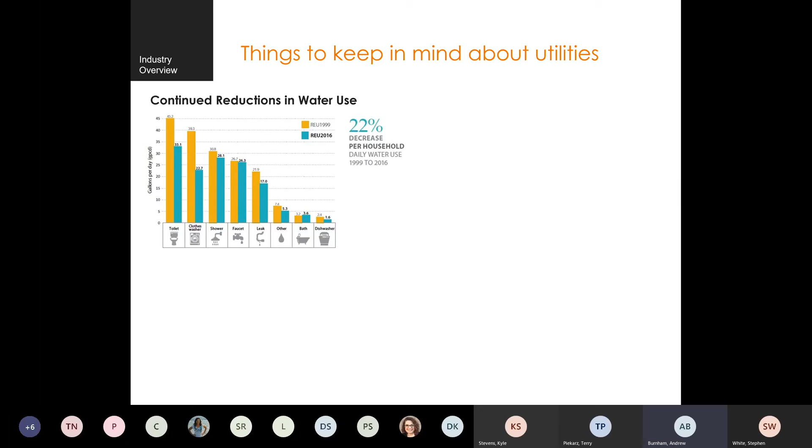Before I turn it over to Kyle to get into the water system, I wanted to remind everyone about a couple of things that cause challenges for utility systems on an ongoing basis. Utilities have not only operational cost inflation, but continued changes in water use, notwithstanding the significant amount of underground infrastructure and staffing levels we have to maintain, and a significant amount of investment in that underground and above ground infrastructure to make sure we can meet customers' and the community's expectations for level of service.

This often results in rate increases, which we talked about last time, that are above the general rate of inflation. We'd highlighted these reasons as part of last time, and we'll continue to come back to these themes. It's important for a fundamental understanding through this process for us all to recognize that utility systems across the country, and the city of Tempe is not unique in this regard, face challenges that cause upward pressure on rates over time, making it very difficult to have a sustainable financial forecast that can meet level of service expectations without future rate adjustments to keep pace with these items.

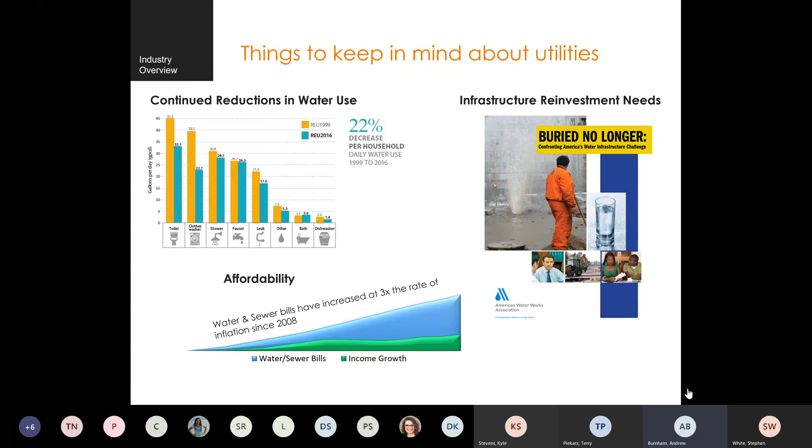I just want to put that out there before Kyle starts walking us through the water system, to give us a bit of orientation and background. So unless there are questions on the big picture, I'd like to hand it over to Kyle, our project manager for the study, to start going through the analysis. If there are detailed questions, Deb, our lead consultant, is also on the phone and may be able to pull up additional details and information along the way. Of course, city staff is here to help and participate as well. So Kyle, maybe you could start walking through the water system, and we'll get into things.

Perfect, Andy, happy to pick it up. With regards to the water system, we've got a few slides. I wanted to put this first one up to give us some guiding information about the system. In a community, oftentimes we don't see the system or the scale of it, since so much of it is buried. So I put some of the big descriptors up here. The one that really sticks out to me is that when you add up all the miles of pipe back to back, we're talking about 850 miles of water lines. There's a lot of pipe in the ground, and it's a relatively complex distributed system that we're looking to fund and understand all the operating costs for over a multi-year period.

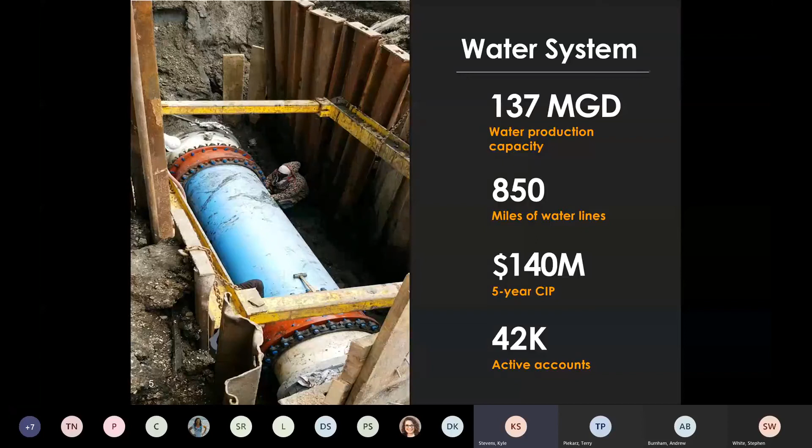If we go to the next slide, and we contrast that against volume, this table to the left shows for 2019 the amount of volume, typically displayed in K-gallons, which is simply thousands of gallons per customer. So this shows the total amount of gallons by customer.

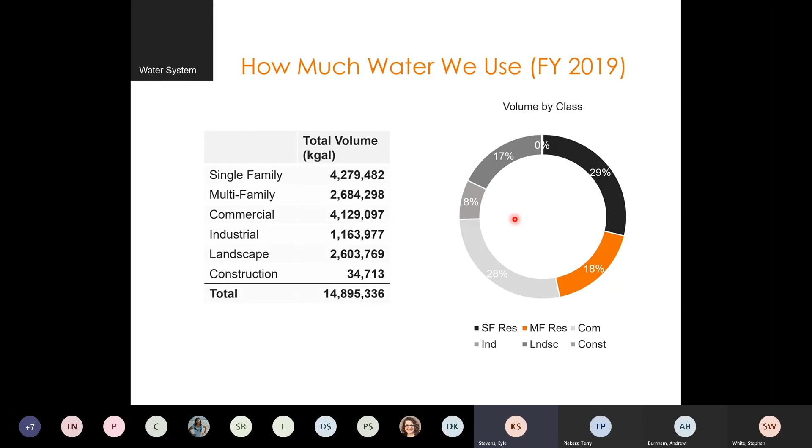That goes along with the theme we've talked about: these are enterprise funds, often referred to as business-like entities, meaning their accounting is completely separate from the city, and charges for services, the use of those services, are the primary driver of revenue to cover the operating expenses.

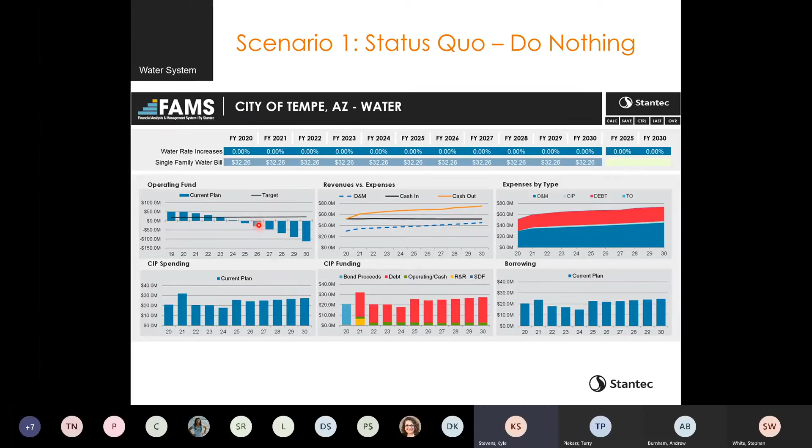And if we were to go to 2025, we would actually see balances go negative. Now, while that's not a reality that could actually occur, this trajectory shows us the rate at which we're burning cash, and that we would go below our defined targets into a minimum situation. So the next scenario one might want to look at is: what's required just in time when the need arises to fix this situation?

So what we can see in this particular situation is, if I start again on this top table, you can see water rate increases. Instead of 0, we've asked the model to fix this deficit on a just-in-time basis. You can see in '21 it's 0%, and '22 a 0. But then in '23, as balances came down very quickly to our minimum, and had we done nothing would have gone negative going forward, the model starts to correct by increasing revenues. In this just-in-time version, it's increased revenues by 10.4% in '23. In fiscal year '24, you see a pretty large adjustment of 43%.

And if I go to revenues versus expenditures, you can see our ongoing deficit. But as our balances start to hit that target, you can see in the black line, instead of being flat, it's crossing over to make up the deficit we've created and create a sustainable plan going forward. So this is one solution. It's a little bit rough, what we like to think of as a rate shock, when you allow cash flow deficits to accrue over time and then have to fix it. It requires a lot of upward motion in one year to fix that problem quickly and not allow balances to go negative.

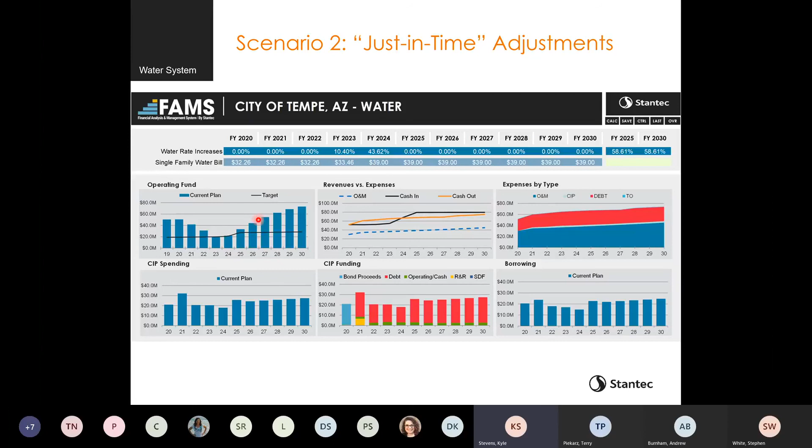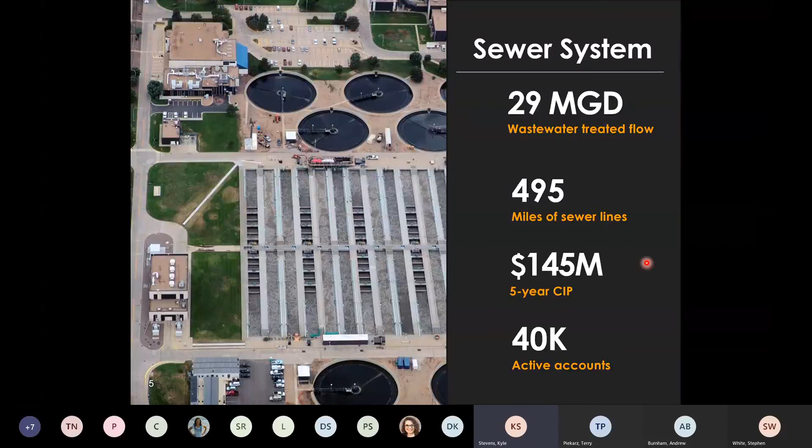Very similar discussion, parallel discussion on the sewer side. So some of this information will be reiterated, just with a different vantage point, looking at the sewer system this time. To give you some idea of scope and scale of the system: wastewater treated flows about 29 million gallons a day, 495 miles of sewer lines, $145 million of capital investment in the next 5 years, about 40,000 active accounts. Very similar to water, a little bit different, but a very similar size and scope, meeting the community's wastewater needs. So how many customers do we have in representation?

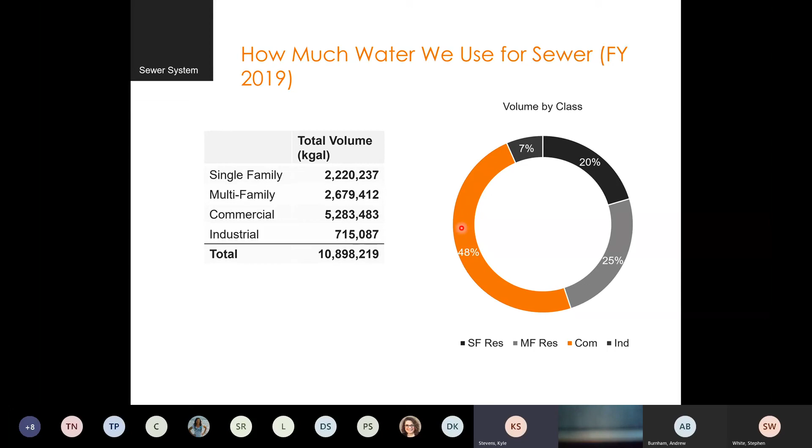If we talk about how much wastewater we use, the water that's used and then returned to the wastewater system, off to the left I've got the table again showing this in thousands of gallons. It's a very similar conversation to before, except the proportions are a little bit different here. Single family is very represented in the number of connections, but when we talk about volumes, they're only about 20%. Multifamily is 25%, and commercial in Tempe makes up a large proportion of the volumetric flows on an annualized basis, followed by industrial.

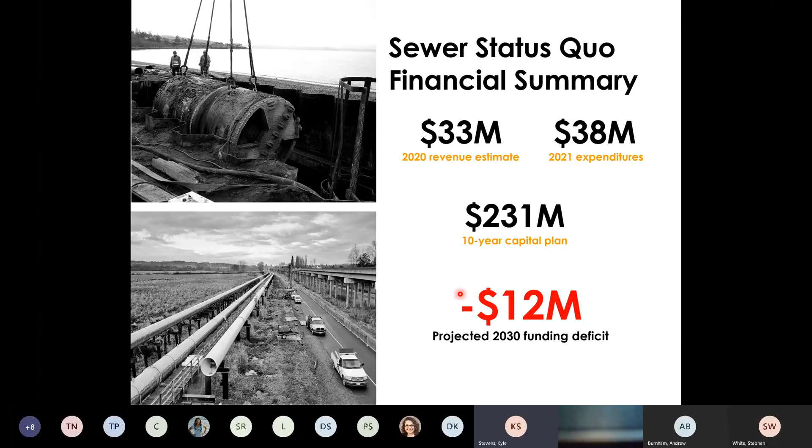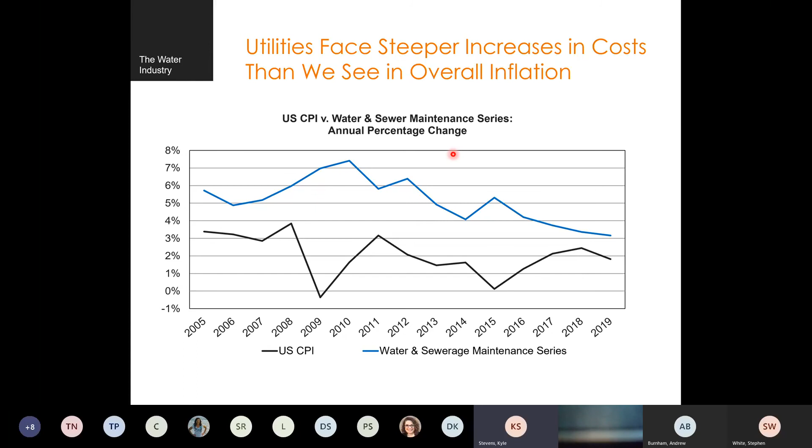Again, just the commentary that typically we see pretty good inflation. The real takeaway on the sewer side is, you're not necessarily seeing that kind of inflation come in the underlying expenses or in the makeup of the capital program that's causing us to do rate increases at a high inflationary level right now. That's a very sustainable system on a go-forward basis and likely will not need increases in the near future.

So Steve, I think I'll stop here. I know that's a lot of information on the two systems and the revenue projections, but happy to go back, talk about it, and dig into it in more detail if there are any questions.

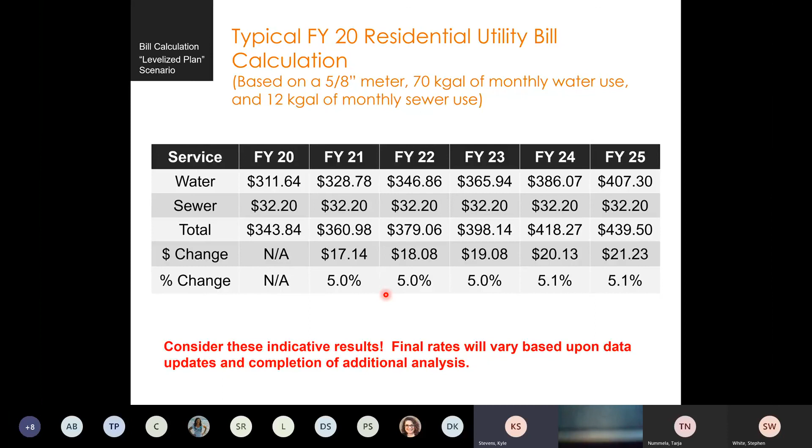Another thing to note is it's not always a peer-to-peer comparison. These figures are useful but typically change year to year as communities make adjustments. They're under similar pressure as the city of Tempe with regard to aging infrastructure and the need for capital investments, so this might change year to year, and there might also be a different level of service under the hood. Just a caveat as we talk about these comparisons.

If we take the larger bill, with 70,000 gallons of water use and 12,000 of sewer use, and stack it up against other communities using that same usage amount, the average bill is about $364. We're slightly under that, still in a similar position, on the lower side if you take the midpoint of communities serving customers within the valley. So still in a good position from a peer comparison standpoint.

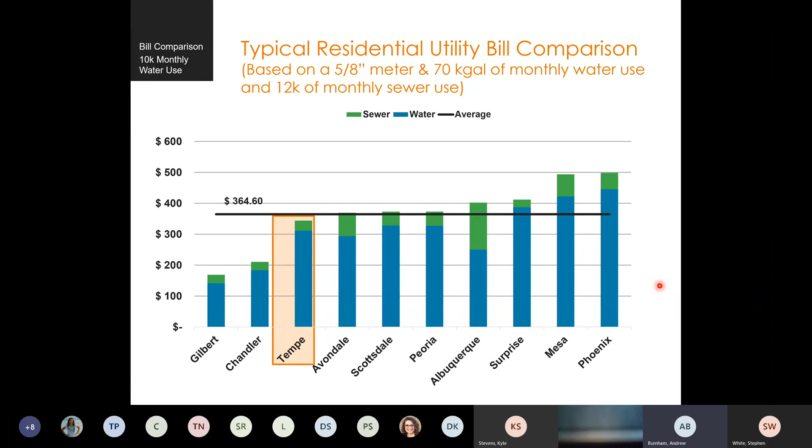Kyle and Andy, Stacy asked a question regarding whether we have a slide comparison for commercial customers, for a large commercial customer. I don't believe we have one as part of this presentation, but I think we can put one together and send it out after.

Yeah, we absolutely could. So the big nuance on commercial is that usage levels can vary widely from one commercial use to the next, and so oftentimes it's harder to come up with a representative typical bill like we just did, where we can say a lot of homeowners or residential customers would experience this. As we go into the next sections, we can talk about some representative commercial examples. We're more than happy to pull a couple out and follow up with what those would look like.

Julianne asked the question, does Chandler use gray water? May I address that issue? Obviously our consultants wouldn't know that, but I'm not aware that Chandler uses any gray water. They do have reclaimed water, but that's a completely separate system that they have a separate rate for.

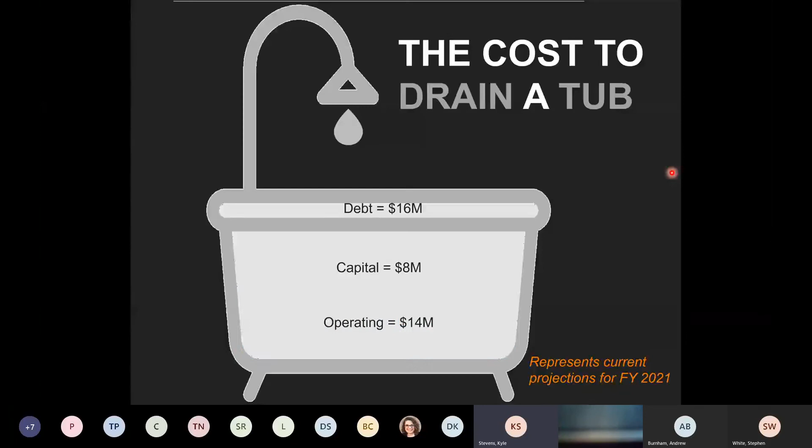The debt profile has actually been, and as we project it out, relatively stable. So the interesting thing about the debt is, while we're funding capital improvements with debt, we're also paying that debt off. As we borrow new money, we have to repay that, but also as we get to the end of a term of loans we've made in the past, that debt falls off. What we try to do, and as we put into our models, is look at that projection of debt service over time. If I go back real quick, I can show you exactly what this looks like. I've actually got it broken out. Let me go to the water system, since that's the one we had increases on.